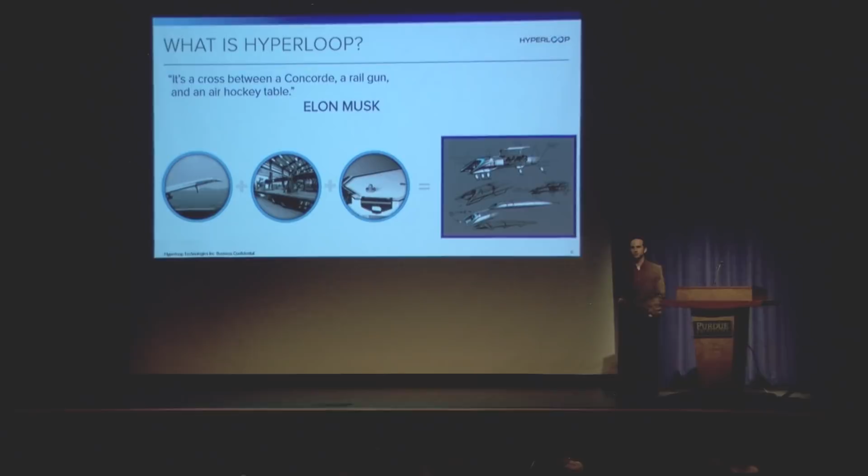That's the Hyperloop Alpha, and that's the white paper that Elon outlined in the fall of 2013, and I'm sure most of the people in this room are familiar with that. That was the starting point. And at Hyperloop Tech, we've really kind of taken it to the next level and moved it to our version of that. And our version of that is this new mode of transportation.

So we're looking at transport inside of a fully enclosed tube that has electric propulsion and brakes to start and slow the pod down. We'll go into all these in a little bit of detail, and you get to see the hardware that we're making.

And then inside the tube, we've got an ultra-low pressure environment, so roughly 1/1000th of an atmosphere, or like flying at 160,000 feet of elevation. So 4 times higher than the plane I flew on 12 hours ago to come here, and Jem has me running around like a crazy dog.

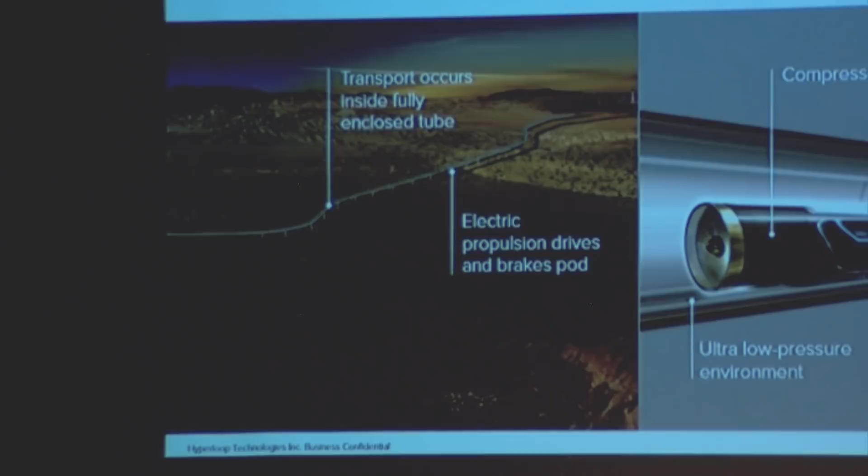But that's a big part of the system, and that's why we've got the tube. We've got the compressor on the front to reduce the effective drag of the vehicle. And then we've got the levitation system, which is the question I've heard the most today from the different groups: what are you doing? How are you doing it? We'll talk about what that looks like.

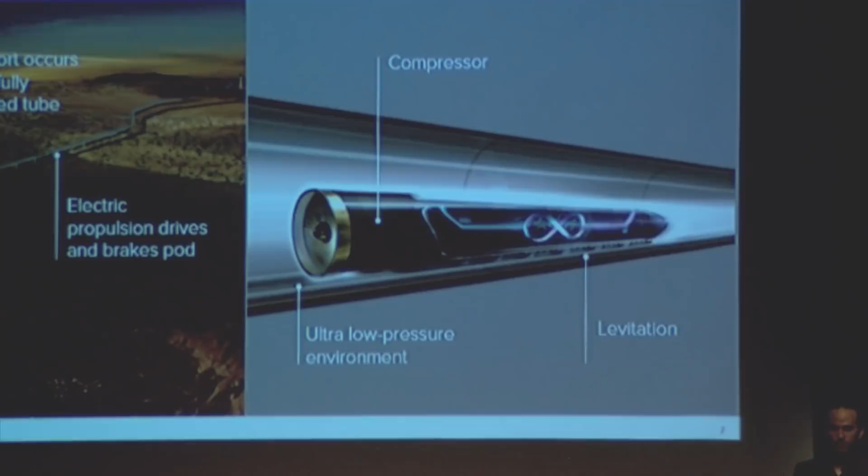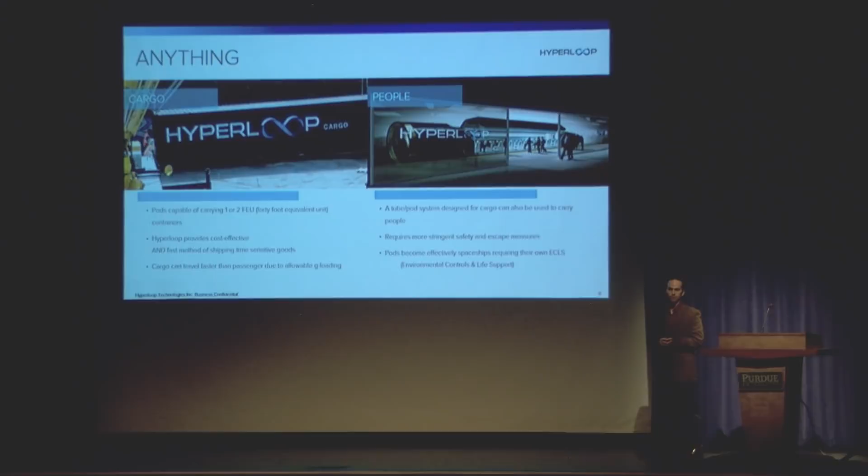But from a high level, we're looking to move anything, focusing on people and cargo as the foremost thing. If you think about what Hyperloop is long term, it's a new way to get from A to B. For people, that means really fast transport, and safer transport than exists currently today. For cargo, that means the on-demand economy we live in and work with today is going to be facilitated. So you've got one distinct Amazon hub that might be in the middle of North Dakota feeding the entire United States with same-day type of delivery. And the last mile with automated vehicles and drones and all of that is really going to be a seamless way to integrate the future together.

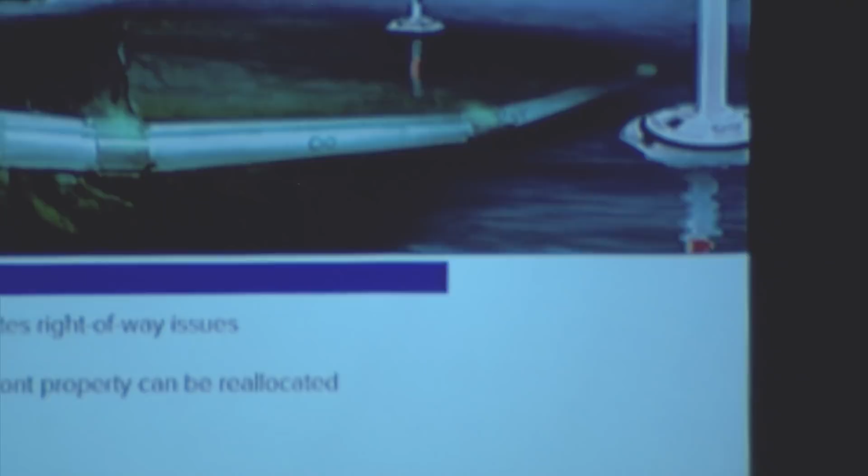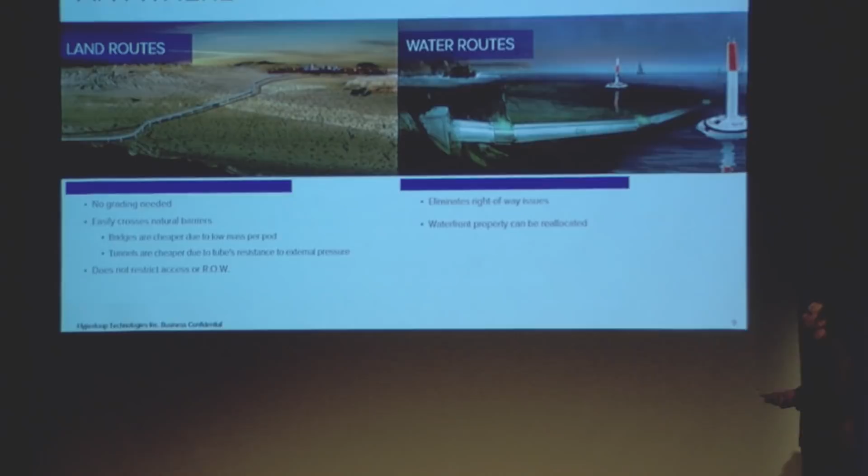And we're looking to move it anywhere. So there were a couple civils in here, so we'll start with the land routes. One of the things about high-speed rail is it's meant to connect two cities together, except along the way it divides the entire corridor. So it's meant to connect people, but it divides them at the same time. Hyperloop offers a solution to not do that anymore. So instead of having this no-crossing zone, we can have an above-ground distinct pylon structure, which is part of our low-cost type of system, and that allows easy access underneath. You can have no grading needed, none of the stuff that high-speed rail would need, and none of the stuff that highway would need, and you can do it at a much smaller footprint in a more sustainable way.

And then ultimately, we're going to move this into the water.

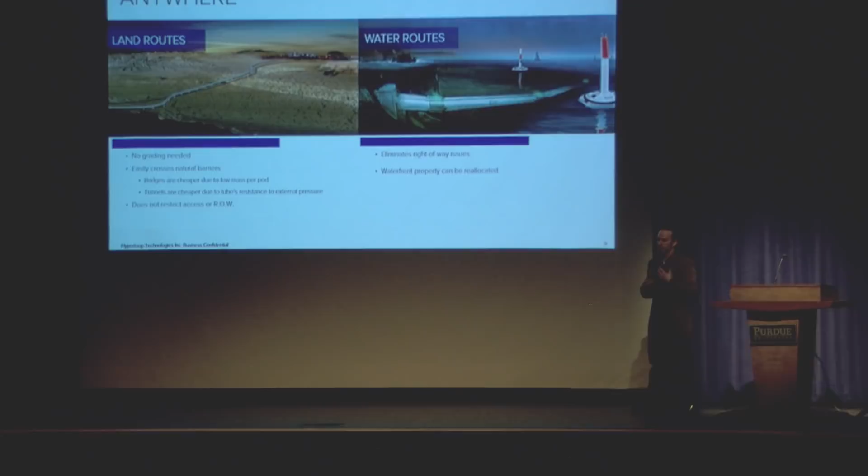So if you think about what a water route means, that means if we went from Los Angeles to San Francisco, we would do that in the water. So you get rid of a lot of these right-of-way issues and a lot of the potential hiccups and hurdles of getting a major infrastructure project installed.

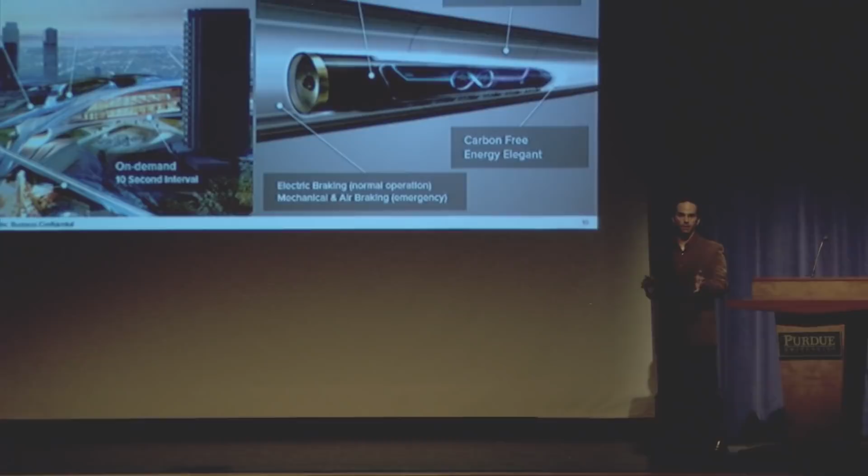And one of the other things that's really interesting about the water routes is what it can do to ports. So if we had offshore ports, let's take the Port of Long Beach, for example. We're constrained in this really high-value area. It's beach city, Los Angeles, California is one of them. And it's congested, it's constrained, you can't expand it easily.

So if we take a Hyperloop and we push it out to sea, say 10 to 20 to 30 kilometers out to sea, the developers of those ports can then say, all right, I can redevelop this land, I can make my port inland at much cheaper land, then I can expand my port in a very organic way, and I can move it further inland and facilitate a broader network of Hyperloop hubs.

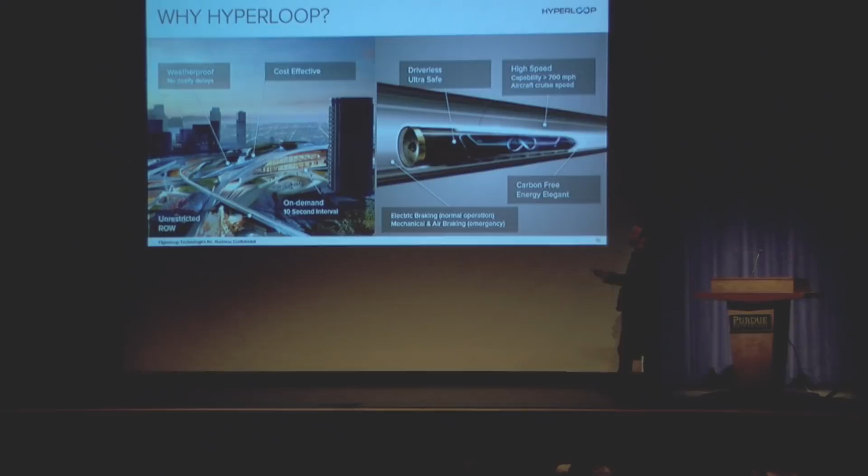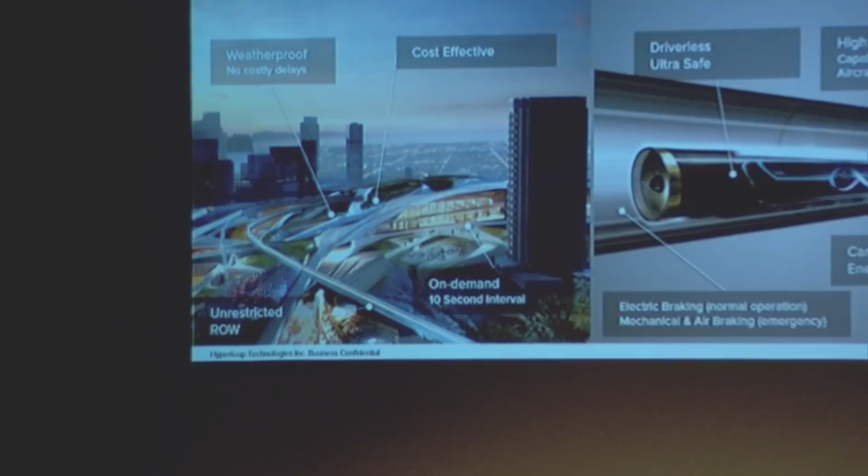So all those things really go to what the benefits of Hyperloop are, and I think a lot of the teams here have identified - I think SpaceX has done a good job of forcing it on the greater community - how do you make your system viable? So these are just a couple of things that make our particular system viable, and it's weatherproof. In areas that are cold, snowy, rainy, stormy, imagine a transportation system that's unaffected by the weather. That's a massive, massive improvement.

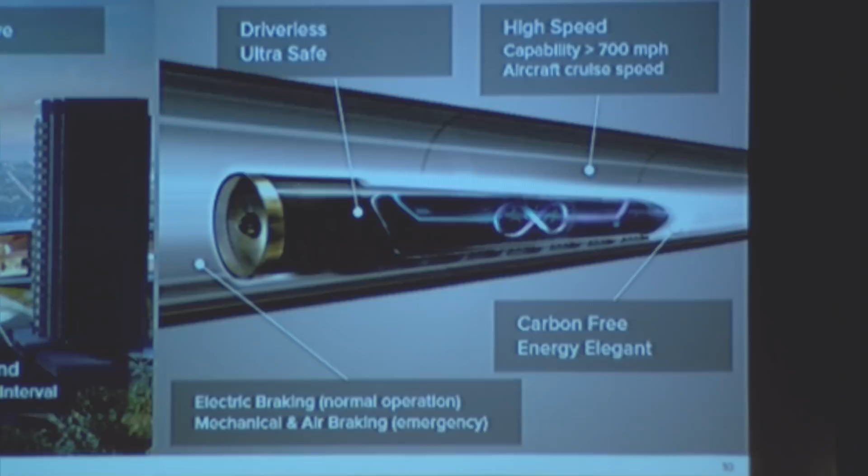It's unrestricted with the right-of-way, as we talked about. It's cost-effective. We're looking at costs on the order of about 60% of high-speed rail for technology costs. And that's 60% cost for a machine that performs 2 or 3 times the speed, which is a massive upgrade. That's essentially getting a Ferrari for the price of a Fiat.

And as we move forward, on-demand departure - we're looking at cranking through these pods at a very high throughput so that we can get as much cargo and volume through here as possible. And then inside we've got the autonomous revolution, of course, the driverless, ultra-safe vehicle.

I had the privilege a couple weeks ago of being at the KTH school in Sweden, and they're really doing some cool work with autonomous integrated trucks together. So looking at doing that for the Hyperloop. How do you do that? What are the challenges associated with these speeds? That's a really interesting design problem from a control side.

High speed capable. It can tie into the grid in a carbon-free, energy-elegant way, and we're not looking to do this old-school, dirty technology. This is a much cleaner technology. There's not grease everywhere. This is really what the future looks like, a clean, elegant solution. And then ultimately, various forms of braking.

So we'll kind of skim through this real fast. Any of you who've traveled at any point in your life already know all of these different things, and it's an expensive mess. You know how congested everything is, how long it takes to get everywhere. And it's not that way just here in the United States - it's that way kind of across the planet. And it's dirty, it's dangerous, it's unsafe. So looking at all of these different things to make it better.

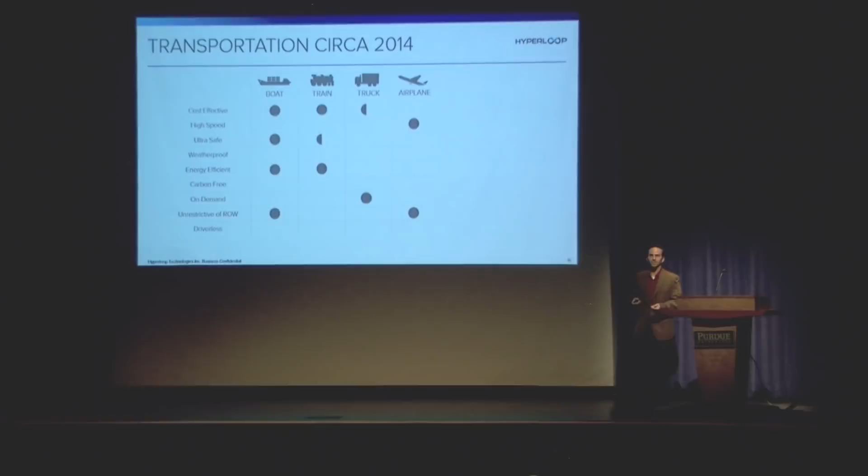These are the 4 modes of transportation, and the one thing I want you to think about is how many people have great-grandparents? Oh good, all of you. So your great-grandparents could take the same 4 modes of transportation that we can - a boat, a train, a plane, a car. I mean, we're all engineers - that's somewhat embarrassing, especially since most of us are mechanical or aerospace engineers. We're still making the same things, and they're not getting appreciably better. And of course, Hyperloop's going to be the solution to all of those things.

So if we're going to look at the team, I mentioned before we had one Purdue alumni who's going to start with us full time, Jem, and he's doing a lot of our aerodynamic work. The detailed CFD and drag and lift studies of the compressor as well as the pod is a unique challenge, and Jem has spent a lot of time in his past during his PhD doing that work. We worked out a great situation where he gets to come to sunny California in winter, just remember that when he leaves you in a couple of weeks. He's going to come out, finish his PhD, but he's going to be doing it on stuff that's related to Hyperloop.

We had, I believe, 6 or 7 interns last summer. A couple of them went back to school, and we've hired 3 of those on full time, and we're continuing to look for that. If you're looking for anything - and we'll get into all the different types of roles they can have - the experience that you're going to gain in the pod competition is going to be invaluable. That's why we love the pod competition, is we can find the best and the brightest.

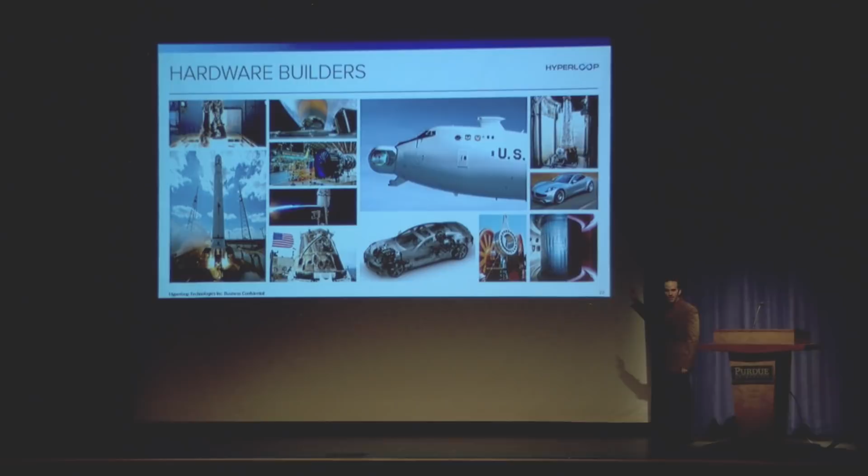And what we're looking for in more experienced people are people who've built stuff. So we built rocket engines, spaceships, electric vehicles. This is a fusion reactor. It's a satellite. That thing in the center is a flying laser - it shoots a 1-foot diameter beam, chemical laser, and then it farts out this noxious gas to the side. And we've got the guys who designed a control system so when the plane's twisting and wiggling and falling, that beam is staying exactly on its target.

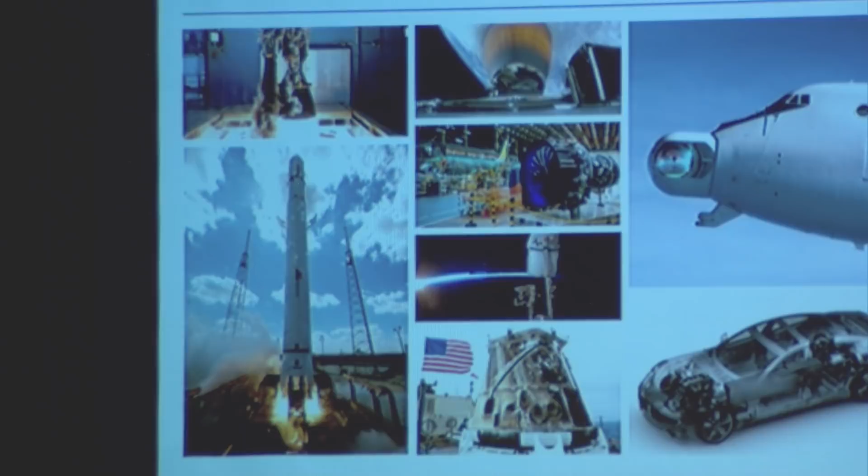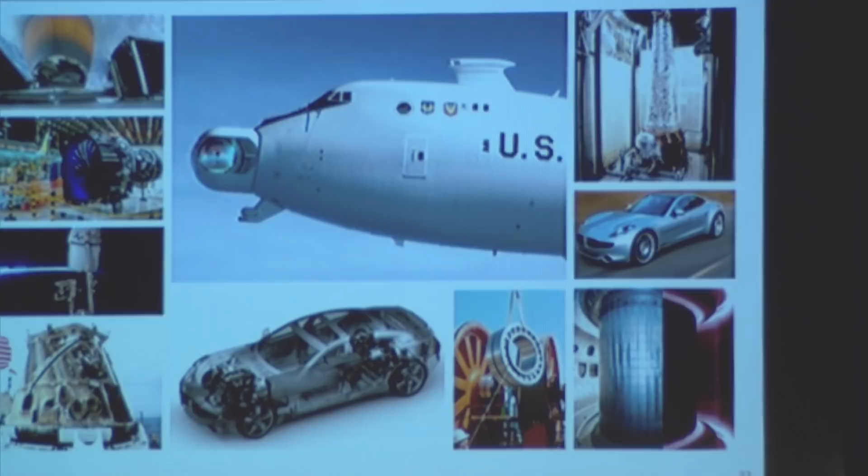So these are the type of people we're looking for - people who've built stuff, people who've built hard things, solved hard problems, but more importantly, people who don't have to be the experts, but want to be the experts. They want to say, 'how do I do this?' And I saw that today in the class - I saw, like, 'why are we doing it this way?' That's what you've got to have, that curiosity, because no one's ever built a Hyperloop before. And we have to learn how.

So we'll kind of roll through this. June of last year, this is when Brogan, myself in the middle, met Shervin, Jim, and Scott Stanford. So that was sort of our kickoff meeting.

The company - I got impatient at Virgin, and I just quit my job. And in November, reported to Brogan's garage. So I'd highly recommend doing that, because you can't put one foot in the kiddie pool if you want to jump in eventually. Just go for it.

So last December, we were in the garage. That's not beer, I promise you.

No, but starting point, we ended up getting our Series A round of funding December 22nd of last year. This time last year, there were 2 people at Hyperloop Tech, 2 full-time people, and that was our starting point.

Since then, we had a sort of coming out party in February, a Forbes article that really announced that we were a company and organization. I could re-engage with my friends socially and tell them what I was doing, because I had to quit a company where I worked with a bunch of colleagues and friends and didn't tell them where I was going, which led to speculation.

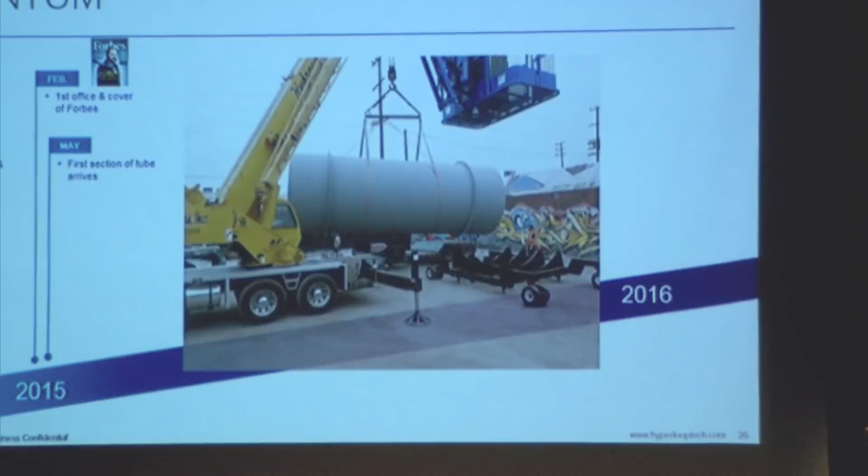In the May timeframe, we got our first section of tube. After May, we started this, and we'll talk about what this guy is. This is our own custom designed and built wind tunnel, and we designed and built it in 9 weeks. Only one like it in the world, and you'll get to see how cool that is. We'll get to tell you why we did that.

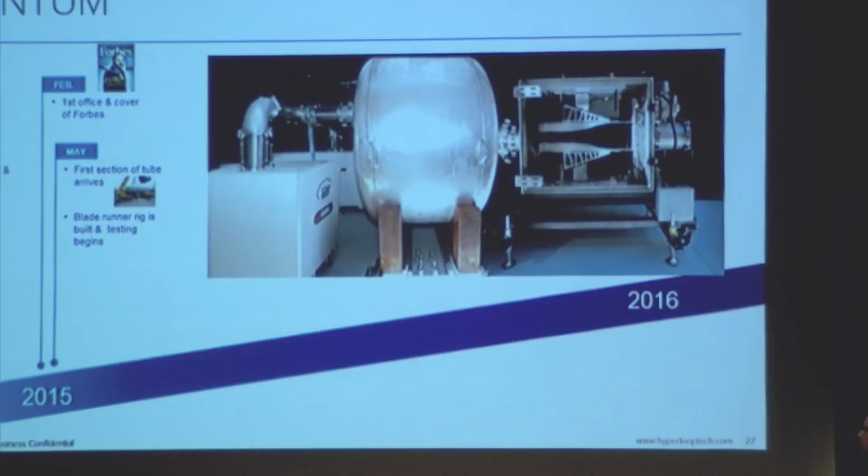Shortly after that, we built our Blade Runner Rig, apologies, a little slow, you can see it here. That's testing our levitation technologies, and we'll give you a bit more detail. The wind tunnel was operational at that point. By July, Rob had come to visit us.

We had about 40 employees. This was the spot then. It was early motor development for the propulsion system.

August, the Levitation Rig was operational. September was a big month for us. We announced Rob as the CEO, got a much larger office space, and increased the team again.

At that point, Rob went on and did his press release, and I think it's better to hear from him. So, you want to play this video? Maybe click it.

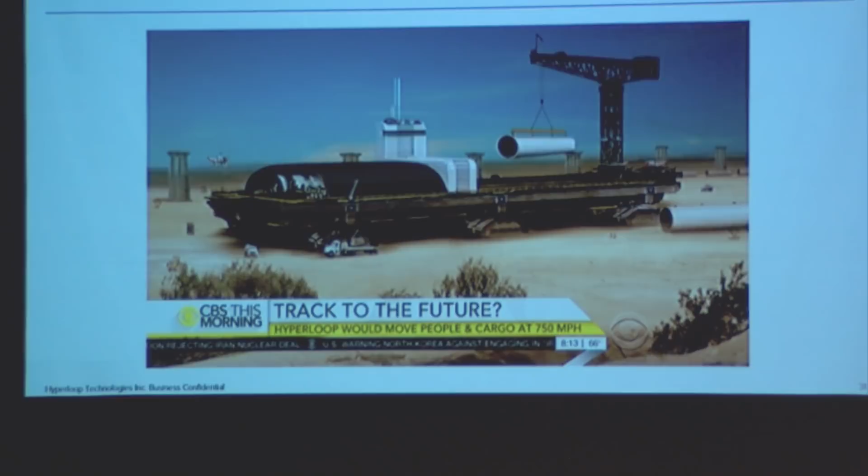Million in second round funding, and the team now includes newly minted CEO Rob Lloyd. I've seen what this guy can do in 6 weeks. Lloyd spent 20 years at networking giant Cisco, where he helped drive the internet revolution. It feels like we're exactly at the beginning of building out the next big global network, except it'll be a network for people and things rather than for data. How long before the first functional Hyperloop system? 3 years from now, I believe that we'll be designing and constructing the first 2 or 3 production Hyperloop systems in the world. 5 years from now, we'll be moving goods and people.

There you have it, straight from the source. So he believes in the company quite tremendously, and it shows. The throughput we've got and the business development side since he's joined has been incredible.

October we moved up to 55 people. November, 70. As of yesterday, we're at 74. So 2 to 74 in less than a year is quite the growth. It's painful at times, but at the same time, we're not doing something small. We're not making an app.

We're making something big. Linear propulsion test, which is a big deal, we'll talk about that in a sec. And then construction on our big test site will begin at the beginning of next year.

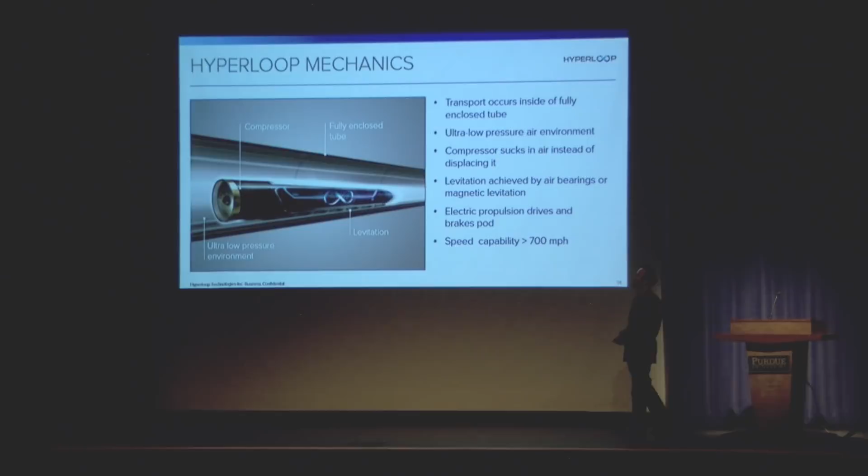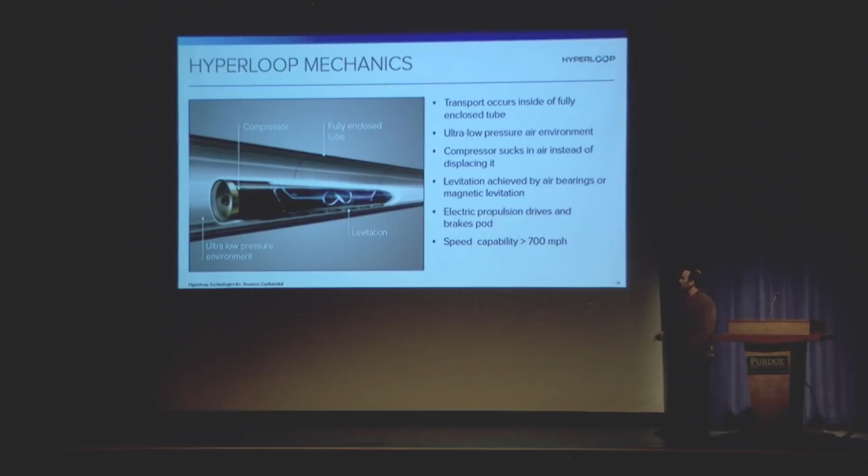So now into the nitty-gritty, the reason you guys are all engineers, the reason you're here: the engineering. We've got the compressor, the low-pressure environment, levitation system, and the tube. So you know all this, I'm not going to go through it in detail anymore, but I'm going to talk about what we're doing and all the different things that we talked about in the past.

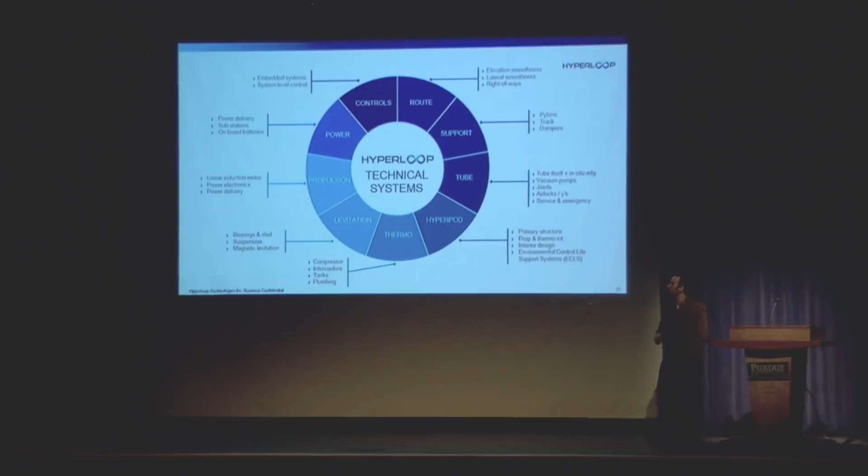So, civils. We've got quite a few things here: support and tube. Support structure, pylons, tracks, dampers, earthquake mitigation, civil soil work, underwater work, all kinds of stuff there. We're not going to do this the way other civil firms do it. We're going to do it in a much more cost-efficient way because we've got a very different system than what exists today. On the tube side, the biggest cost driver, if you look at the Hyperloop system, is the tube.

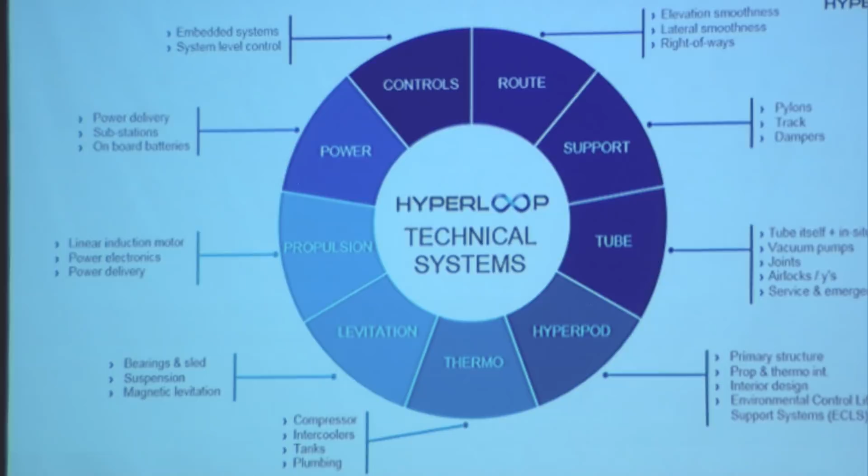Let's make it cheaper, let's make it better. We've got some really cool stuff to do that, and we can take massive cost savings. We can make this one of the cheapest systems, more robust than a steel tube could ever be. We're doing that optimization. These ideas aren't the ones that sit in your textbook. They're the ideas you think about at night, come in, execute, and come out with a new way to do it.

We'll talk about route at the end. Hyperpods—so the mechanical and aerospace side here. We've got basically a chassis. How do we build this thing? What do we have to put in it? Propulsion, thermal systems, environmental control, you name it. How do we integrate that into a package? How do we reject heat? What's the thermal cycle on this? If I'm going to use a compressor, how do I cool it? Do I need to cool it? What does this look like? Is it existing technology or is it brand new?

All of this stuff is massive amounts of innovation and iteration, because we can build a Hyperloop right now, but it's not going to be as cost effective as it can be long term. So that's what we're looking to do—figure out a way to do this even better. We've got some great ideas we're working on in parallel with the big development.

The levitation system—the question I've heard most often from every different school I've gone to is, what are you guys doing? Is it air bearings? Is it maglev? Is it magic? Is it fairies? We'll talk about it in a bit.

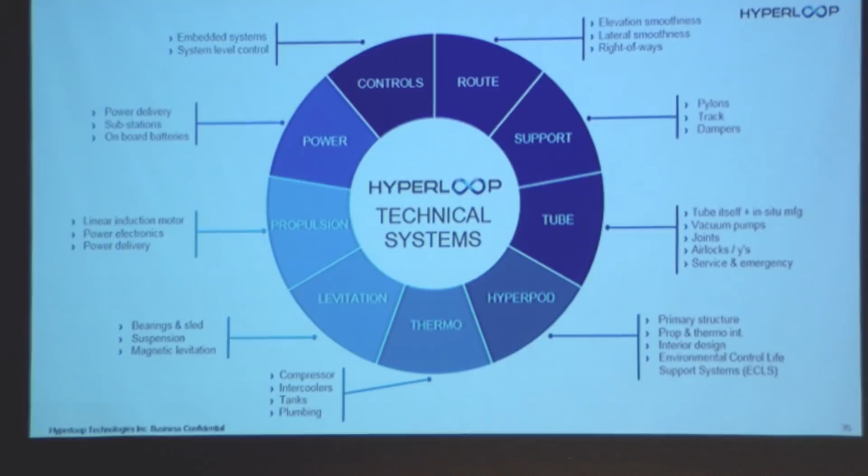From a cost and efficiency standpoint on the propulsion side, nobody really makes these linear machines, nobody makes them at the power levels we want. How do we do that? How do we validate it? On the power side, we're looking to deliver 30 to 60 megawatts, pulsed power—I'll tell you how much utilities love that, they're like 'what?' So how do we do that? How do we do it cost efficiently?

Control side—these are autonomous vehicles. So all of that stuff, how do you make it work? How do you talk to the pods? If pod 2 has a problem, how do pods 3, 4, 5, 6 react to it? How do they deal with it?

The route—this is something I'm ultra passionate about. All of these little systems are encompassed in the route, and they're encompassed by an optimization framework. How do we create cost models, performance models, route models? Where do we tunnel? Where do we bridge? We've got some of the most sophisticated optimization tools out there, and we've built on those with our own designs. That right there is the key to the kingdom, because we can do all kinds of innovation here—if we mess that up, it doesn't work.

I talked with a couple of professors today who've done a lot of work with the grad students here on optimization. Learn it, use it, love it, breathe it—it's going to be the way of the future.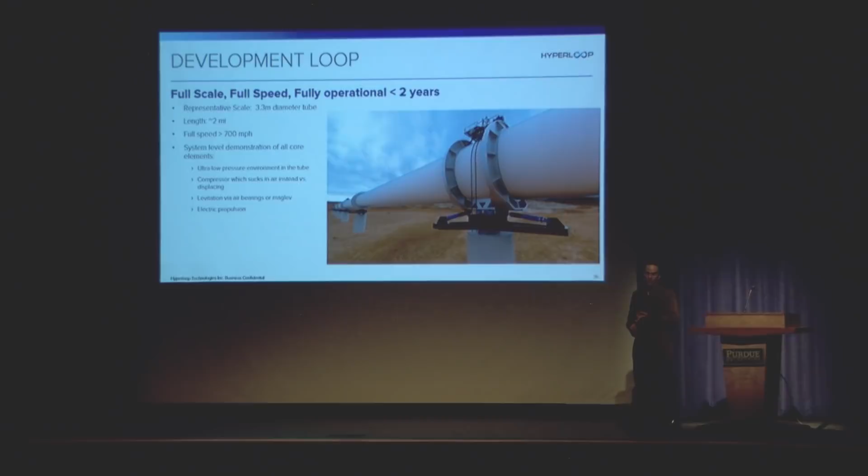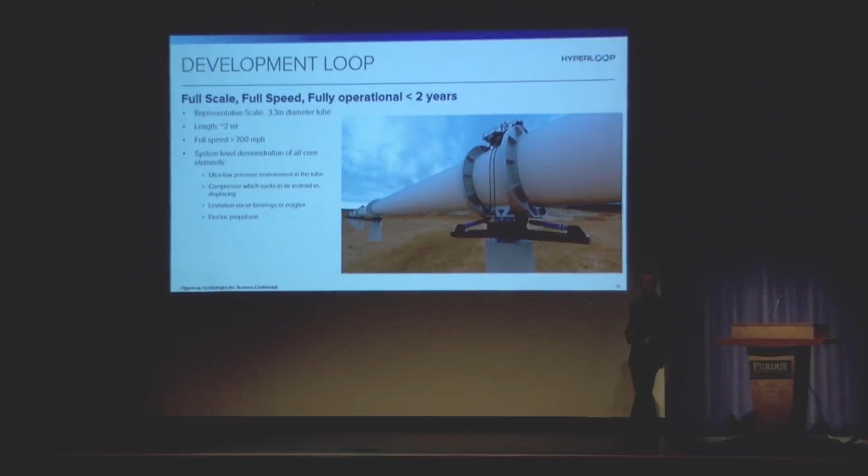We can hold pressure, we have a levitation system, we've got a compressor on the front and an electric motor in there—complete system. This will not be representative of the accelerations people will actually see; this will be much higher, accelerating at like 2.5 Gs, slowing at about 4. But that's way harder than what we're doing for people, so it'll demonstrate that we've got the controllability.

Here's a little more detail when we look at this. So DTLA, this is our development in downtown Los Angeles. We're building this crazy tube—we've done it, you can see it right here, and we've welded it up. We've done vacuum testing; we've held vacuum in here for 10 days without constantly maintaining it, so our leak rates were way smaller than ever.

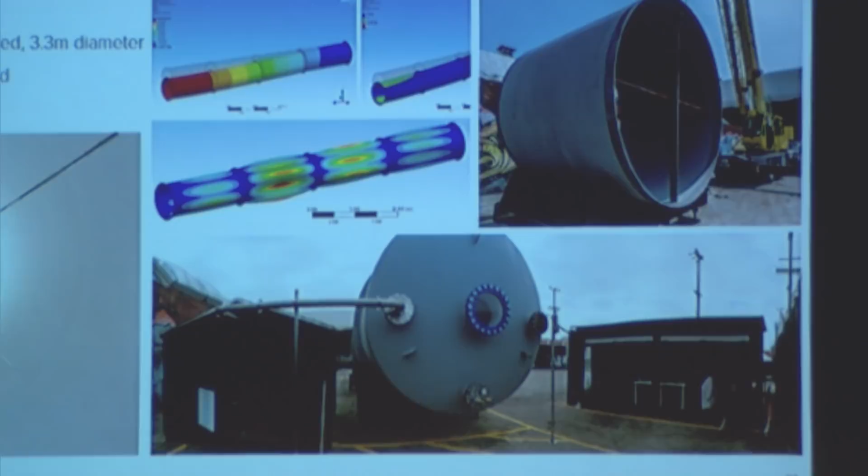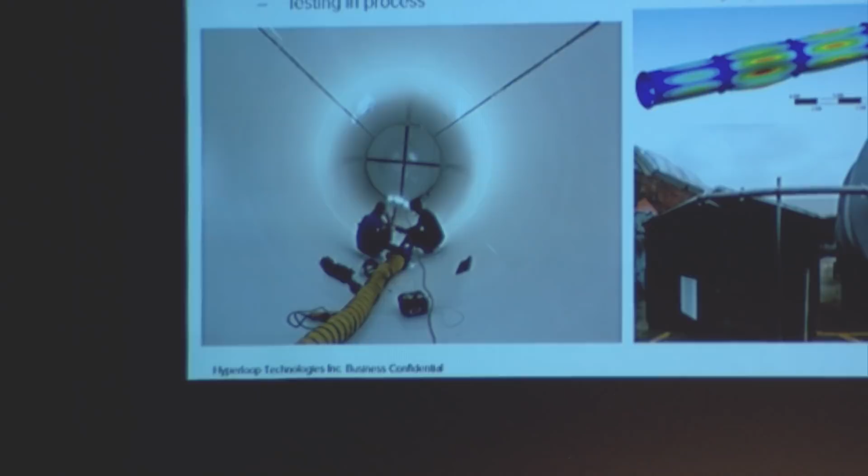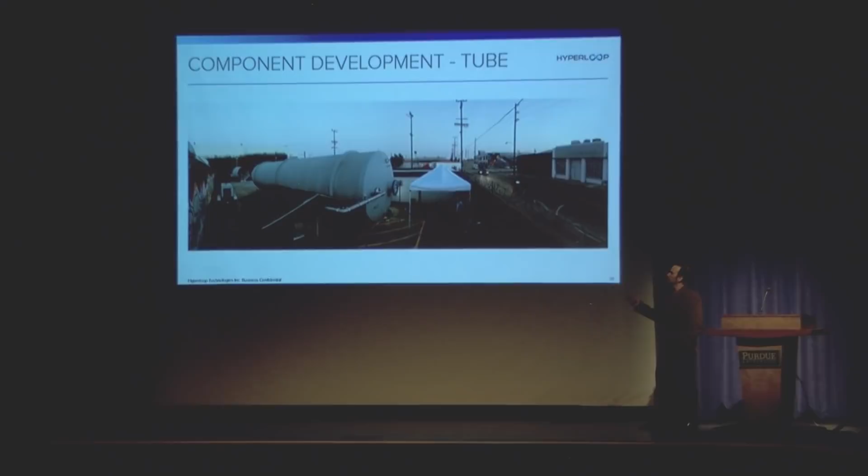In the initial group that did these welds, it looked like I did the weld, or it was Jimmy's first coloring project—and the leak rates are well less than we ever thought they would be. That's boding very well for maintaining the system, and we're going to get more data as we get to the larger tube. Here's some more pictures of the tube, to get some rough dimensions of it.

And then this is our vacuum test. How many people have pulled vacuum before? All right, how exciting is it? It's like watching paint dry. So we at least put a balloon in here so you could see that something was happening.

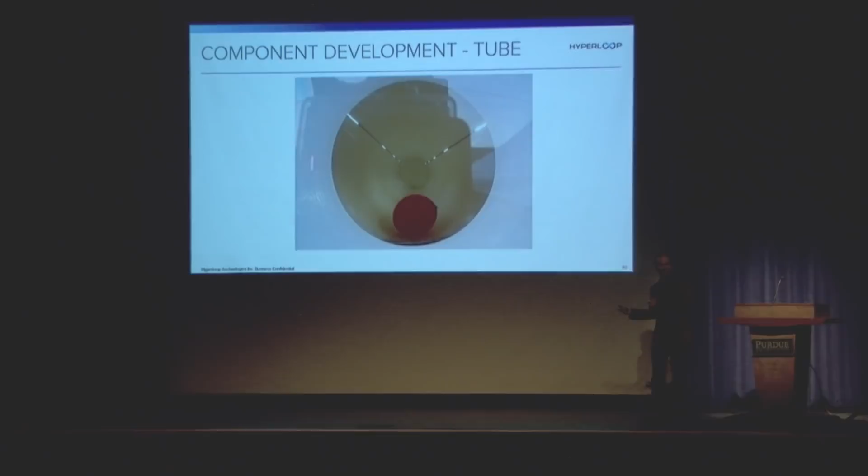And it didn't fail. I probably wouldn't have shown you the video if it did. Maybe I would have, depending on how great it was. But it held. This is just to show we can do that. We've got the ability. We learned quite a bit from that, and it's still part of our ongoing test bed.

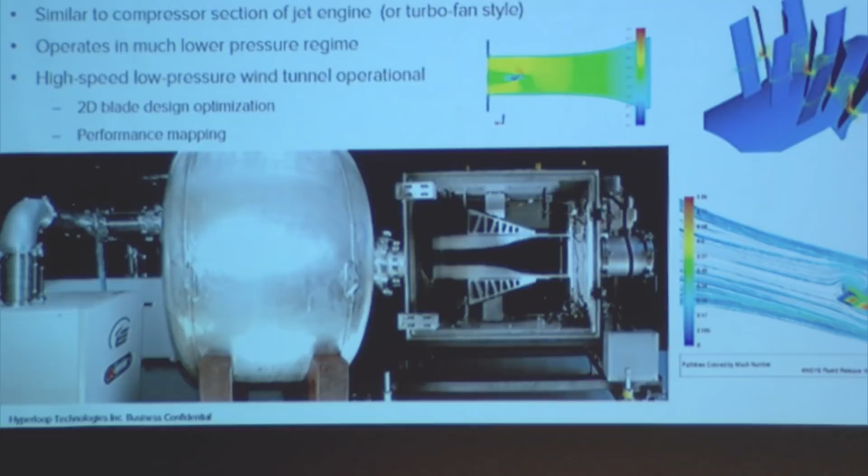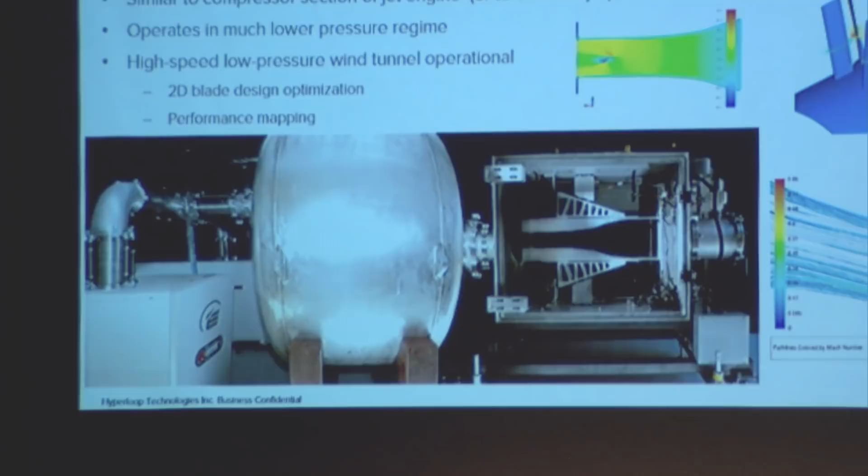Compressor. So we talked about what this is, flying at 160,000 feet. The only thing that operates in this is either going up through it or down through it. Nothing flies here, nothing does anything, so we had to develop something to do it. And the computational tools, they're not the best.

So we went out and we got a Purdue grad to help us with it. And so we've got some CFD models. These are some Navier-Stokes solutions using conventional off-the-shelf codes. We've got some ideas for it, and some other more academic codes that we're using to verify it.

But in the same vein as everything else we do, we have to go test something, because we're no good without the test. So we designed and built this wind tunnel. And you'll see that here.

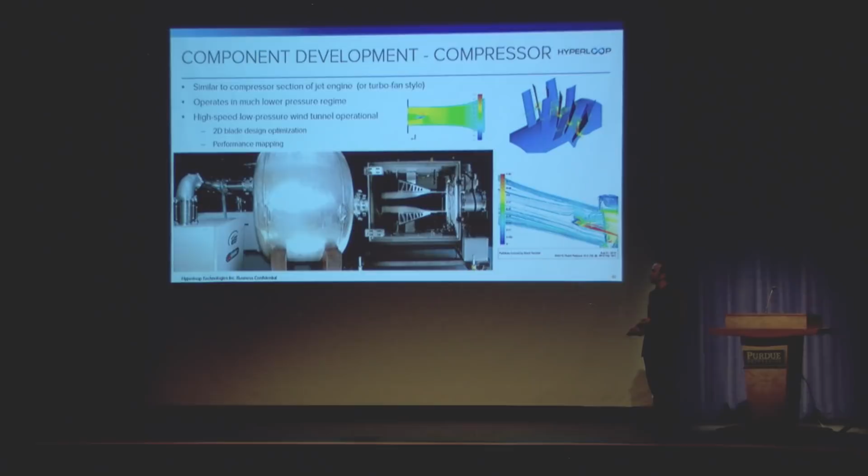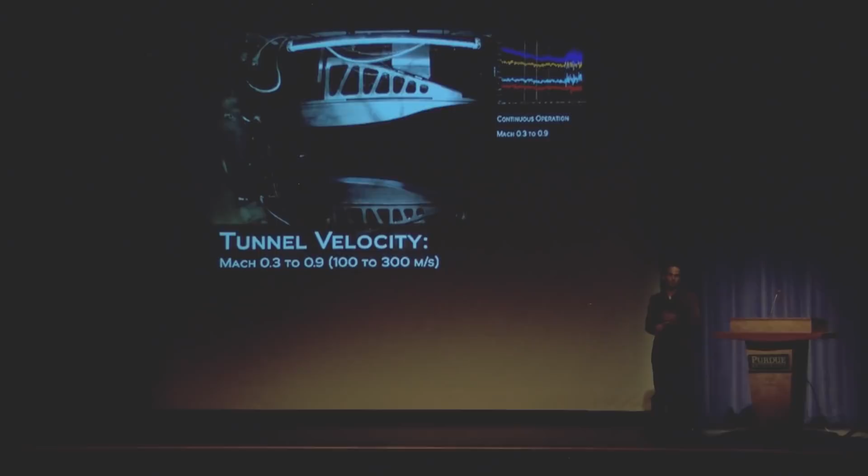Let this play. But again, this is something where I called a vendor and said, hey, I'd like a wind tunnel in 2 to 3 months. And he said, we'll get you a design in 2 to 3 months. And I hung up the phone and said, well, that's not happening. So we designed, analyzed, and built this with a team of 6 people in 9 to 10 weeks. Kind of gives you a feel for the speed at which we execute.

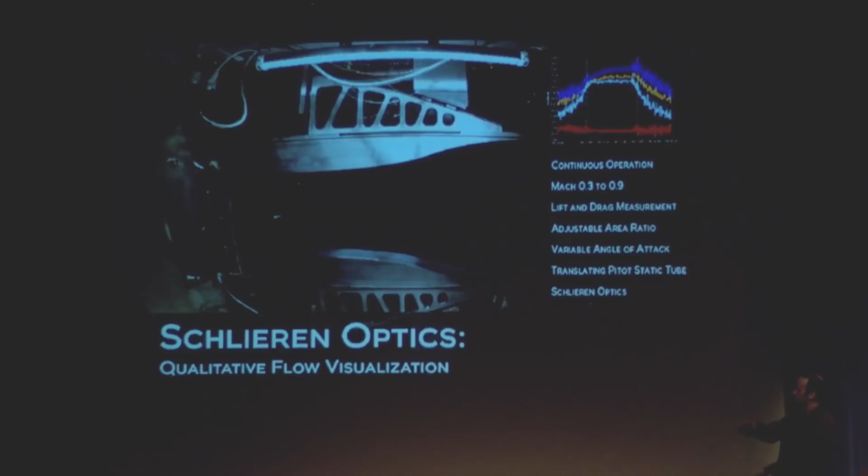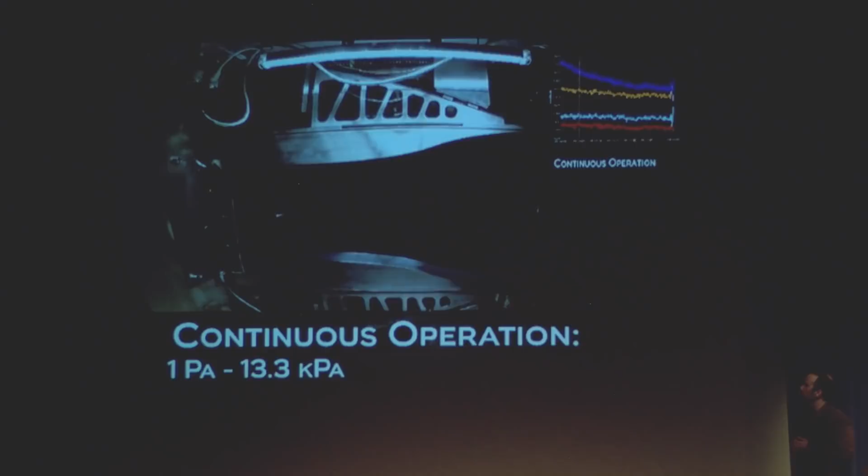But this is a fully capable wind tunnel. We can adjust the test sections to measure lift and drag of our airfoil shapes for the compressor. We can put mini pods in there. It's really the only one like it in the whole world, and it can run continuously, which a lot of the other ones can't, since they're just blow-down type wind tunnels. But it's a real great piece of engineering. It's a great showpiece, but it's providing a lot of very, very valuable data. And it's going to be an integral part to Jem finishing his PhD with Hyperloop at Purdue.

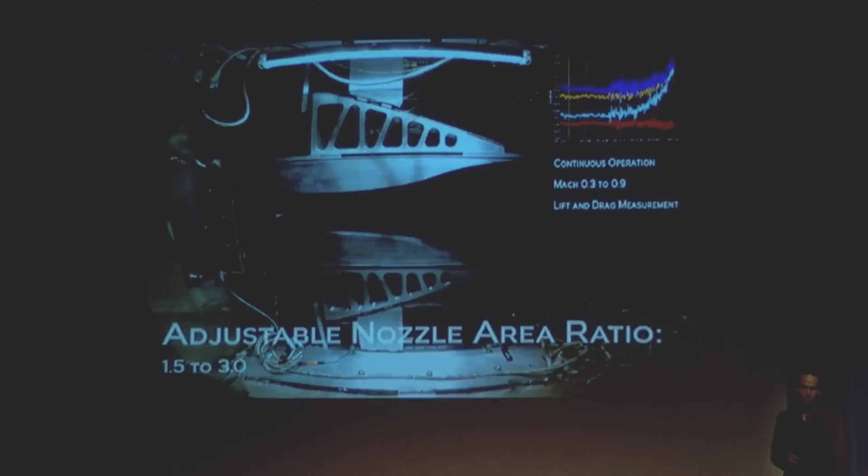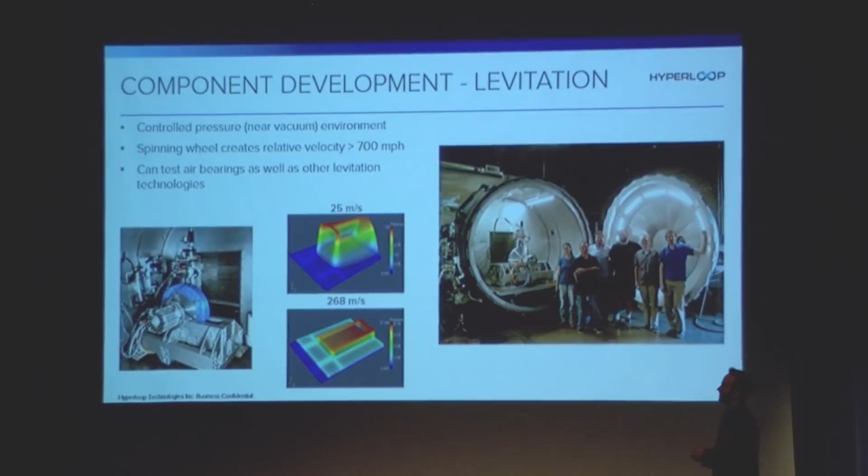So then our levitation rig, and the moment I know you guys have all been waiting for, and I'm probably going to disappoint you. But initially, we were starting with air bearings. So this is some air bearing work. We've got a little rig here, and you'll see it. And this might be why we don't want to use air bearings, at least right now.

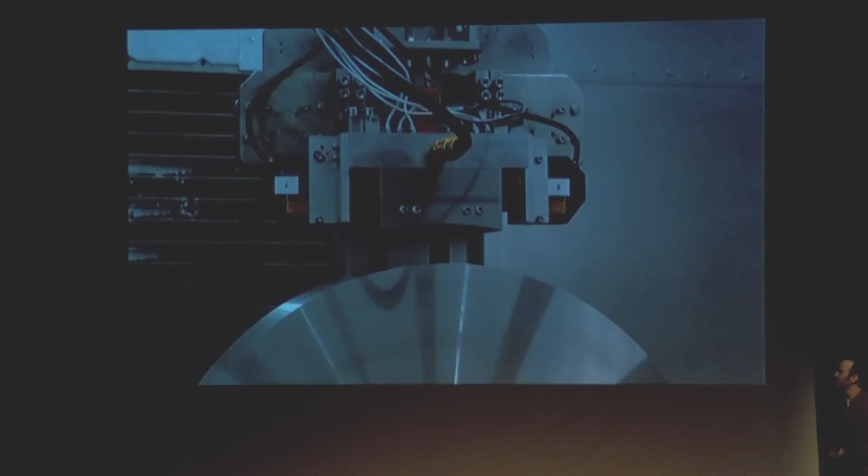When do you think it's going to stop? Is it? Is it going to stop? Okay, it did.

So that's our levitation rig. We've got measurement sensors on that. We can measure lift, drag, we can measure stiffness characteristics, quite a few different designs. And we've moved away from the air bearings to a passive maglev system. That offers quite a few things in terms of energy savings, heat transfer savings, cost savings, ride height. It's really quite a big change. And in my experience, I've never seen really a trade study that was so clear cut.

So a lot of work to be done. It's a very different problem than what the SpaceX competition's offering, because they have a track ready to go and we're designing our own custom one.

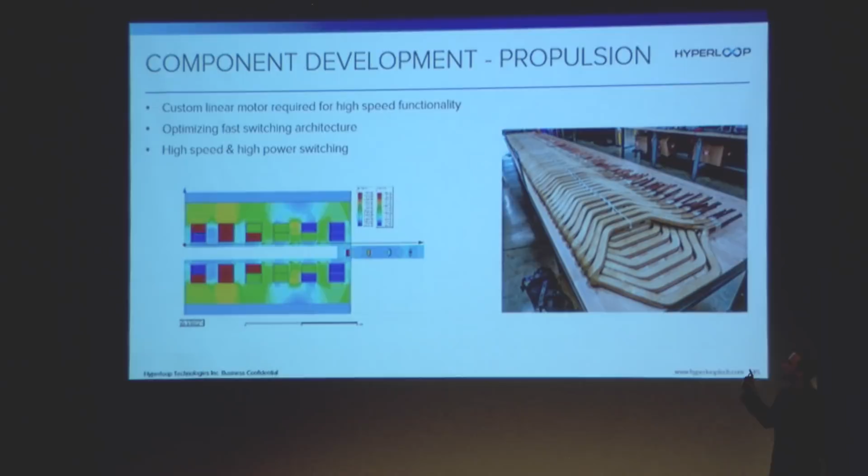So had a big announcement yesterday, and I'll skip to the goodies. But this is our propulsion session. So cut that rotational machine in half, unroll it on the ground, and then you've got a linear electric machine. So this is a linear synchronous motor. And we get those poles just lined up, slightly offset, and we drag that cart forward at full speed. So you guys came at a great time. I'm glad I could announce this today. You want to roll the video?

So yesterday we announced this, which is our propulsion open air test, which is testing the exact same motor that we're putting in the tube.

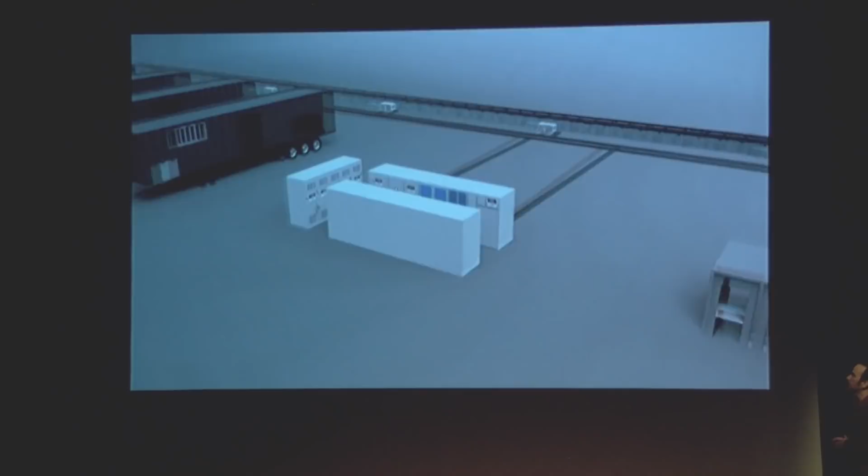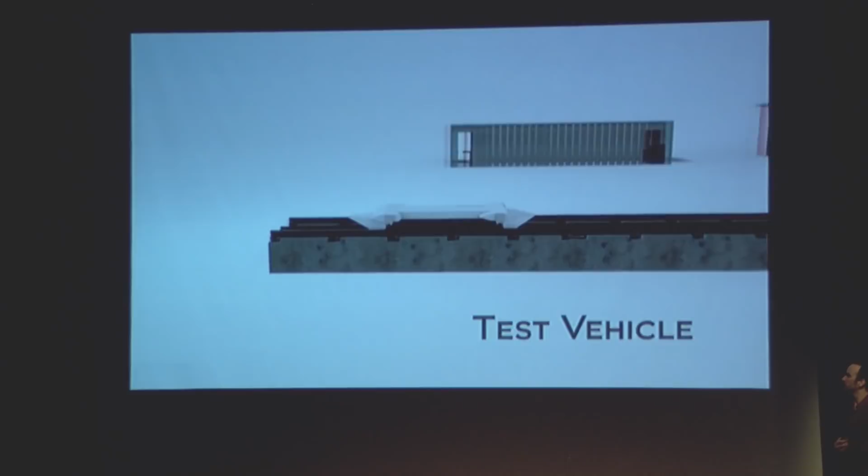So we've got our command center, which we've fabricated on site, and we can ship out to the test site. Here's our power electronics VFD, switches for switching the different active sections of track, and then here's the length of track. This is about 200 meters long. Test vehicle, and you'll get to see basically this thing take off.

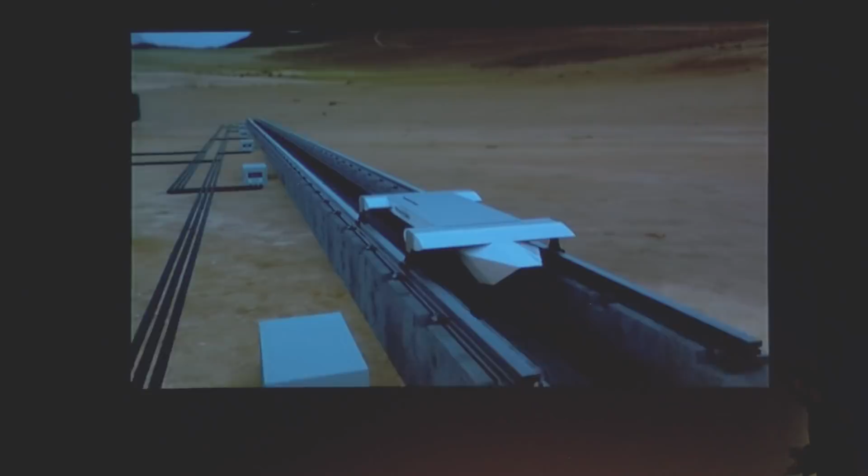And this still doesn't give it or do it really the justice that it does. For example, a Tesla goes 0 to 60 in something like 3 seconds. This goes 0 to 350 miles an hour in 2. So maybe we'll offer some rides, some intern rides. It's going to be pretty exciting.

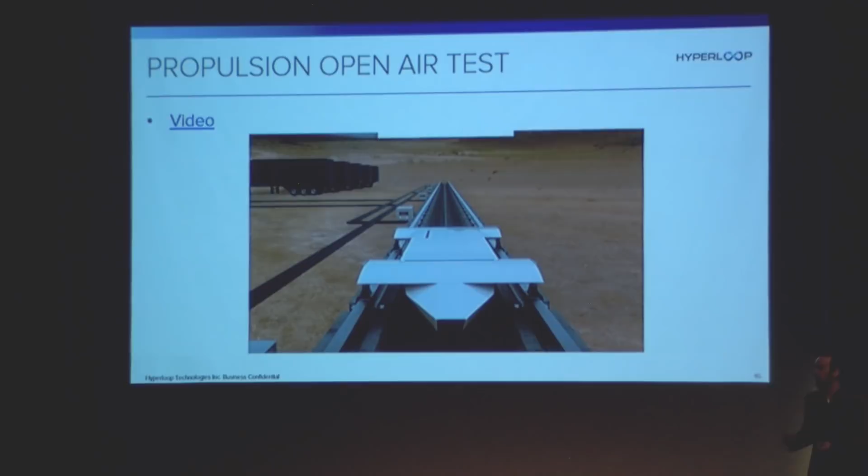But the real crux of this is, you saw the little testing machines that we're doing for the levitation and the compressor and everything, but this is the test machine for the motor. So this is the exact motor that we're going to put inside the tube, and we're going to make sure that it works here on this scale before we buy 2 kilometers worth of it.

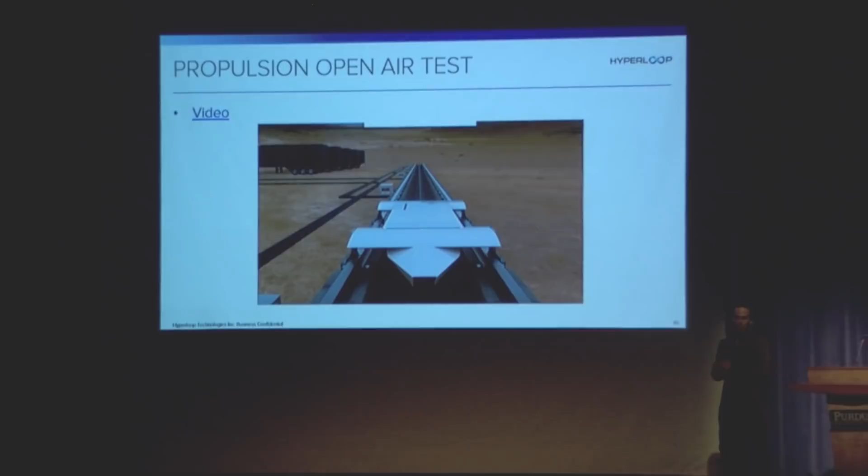Here's our route optimization. So this is an unnamed route in the southwestern United States between 2 large cities.

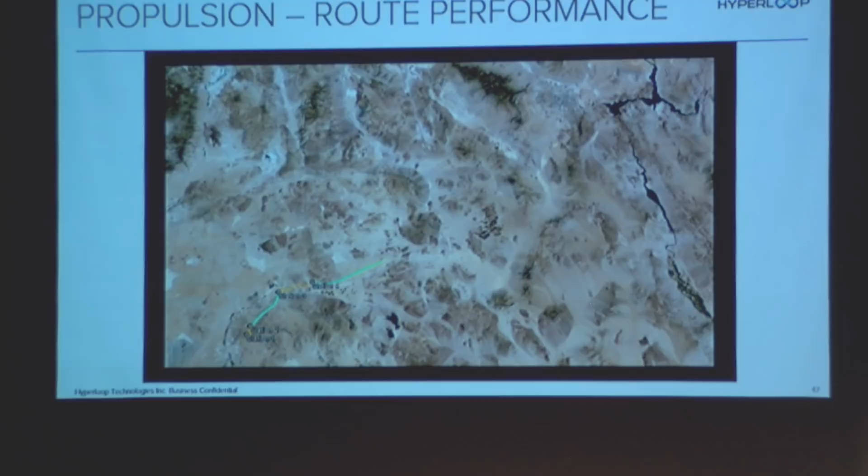So this particular one is, we've got these stations. One of the great things about Hyperloop, what makes it so cheap, is inside this tube the drag is so low that we don't have to have active track the whole way. We've got these discrete little stations that give a little boost, so only about 5 to 10% of the whole length of the track is actually active.

So in between these stations, we slow down from about 700 miles an hour to about 620 over about 50 miles. That's a very slow slowdown, and it allows us to have a really cheap, efficient structure. The maglev you see in China, the maglev you see in Japan, has an active track the entire way. We don't, and that's one of the reasons we're so cost effective - only in these discrete sections are there actual propulsion stations.

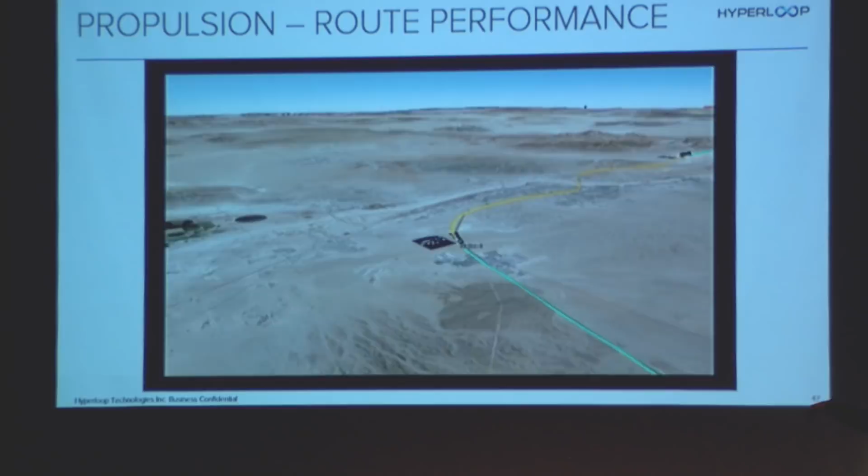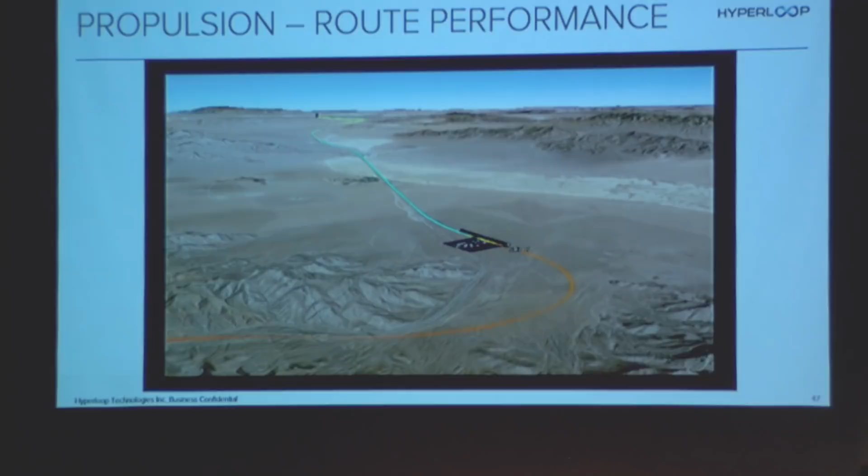This is a particularly windy route, so the optimization we did here is subject to G-loading and banking and all of that, but that's all part of our optimization toolkit that we're refining. Where are we tunneling? Where are we bridging? Where are we doing all these different things? That's one of the things we are going to be the best in the world at, because we've got some amazing people and some amazing tools already being developed.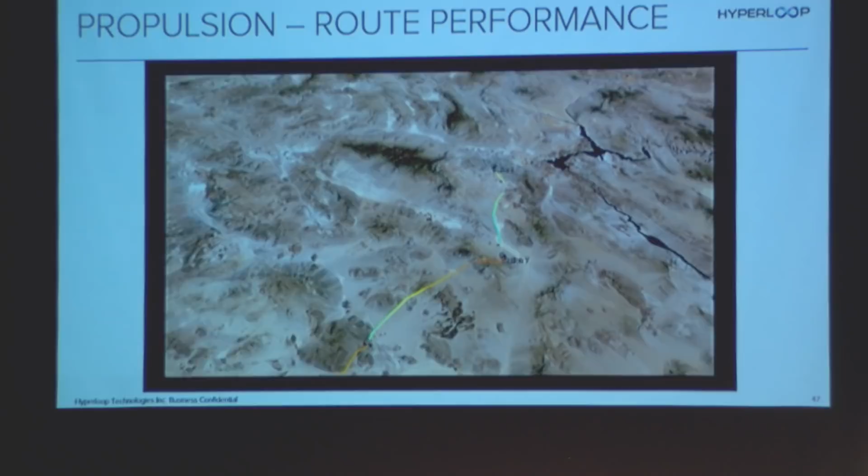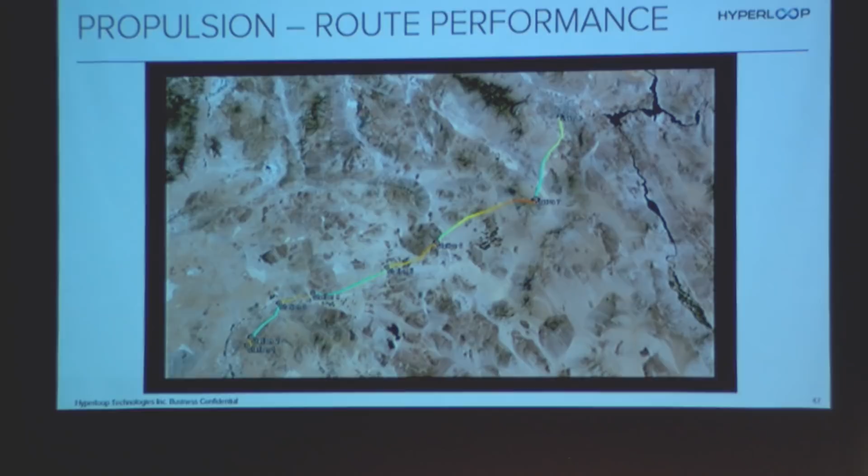So this was, again, the office in March. This is what it looks like now. We've gone from 6,000 square feet to almost 2 acres with about 18,000 square feet under roof.

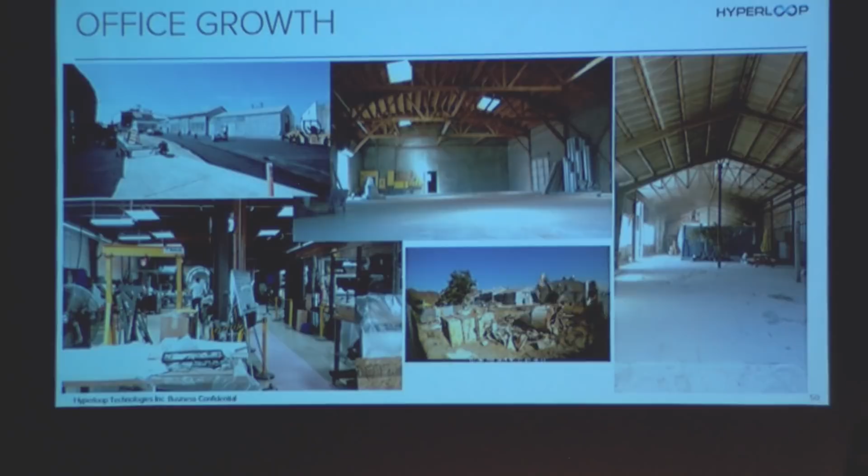You came, and in the meeting we were in for an hour, there was a new wall built. We had to walk around that wall to come out of the meeting. So it's really an amazing amount of growth, both physically and in terms of the team and in terms of the technology, in a very short time, because we say we're going to do something, we say we're going to build that tube by the end of this next year, and we're going to do it, because that's all our backgrounds have done and that's all we've ever done.

So this is some of the structure in the back, so that was the buildings inside. This is some more manufacturing space that we're getting. So we're going to build the first 2-3 pods.

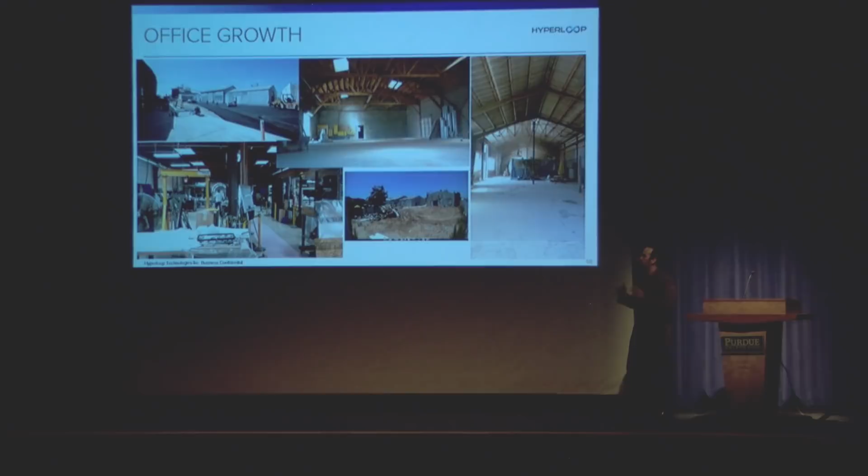This other building, this beautiful building that actually looks like a wooden aircraft hangar, is going to be more office space. We're getting pretty filled up. This is sort of back in June, clearing out a bunch of the space in between. We've got all this area to continue fabricating inside. This is our current manufacturing space, and you can see some of the test rigs in the back. So massive growth with that.

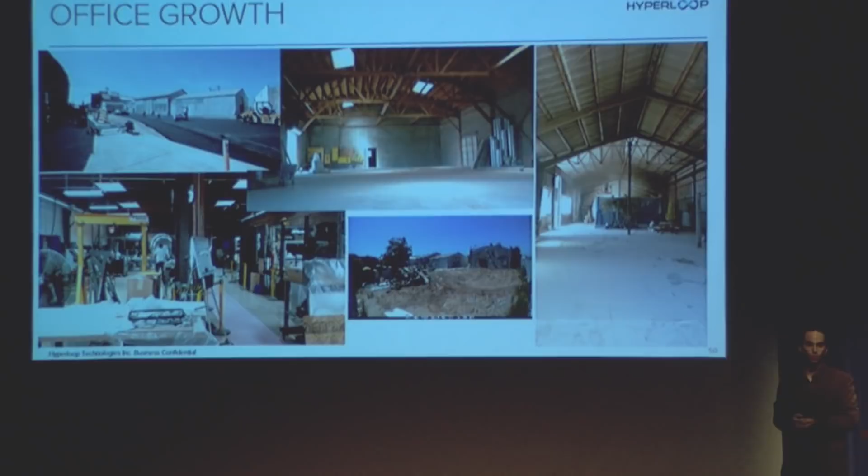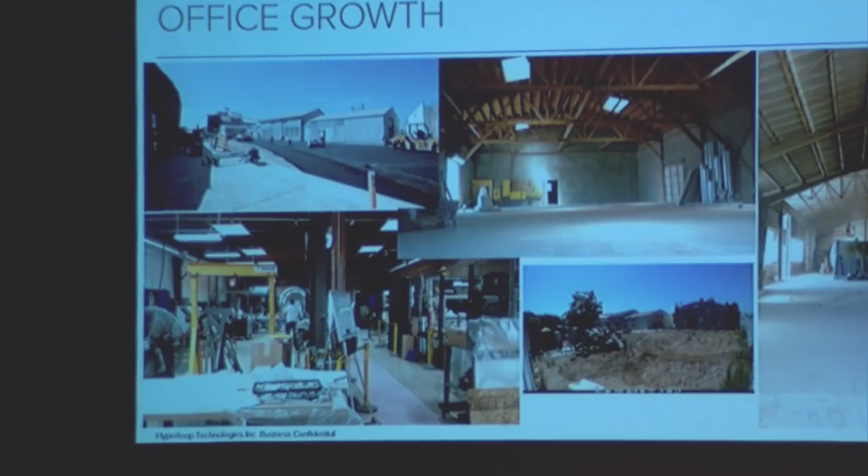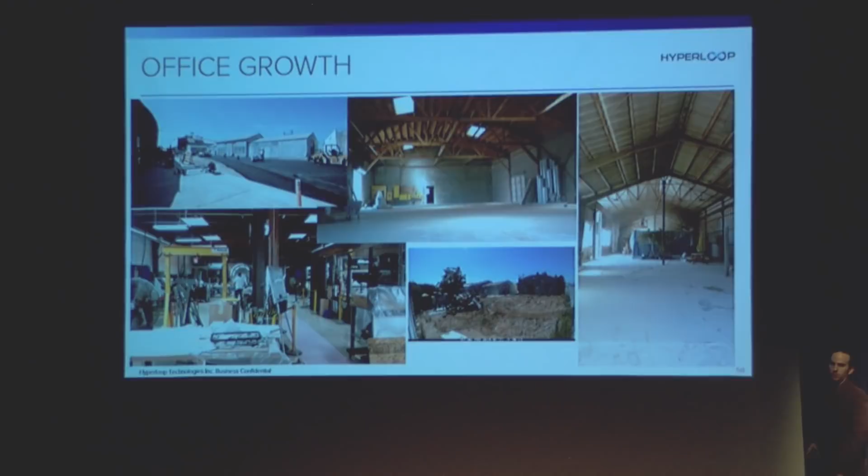We just announced our test site in North Las Vegas, about 25 minutes north of downtown Las Vegas, where we'll build the tube. We announced that deal Tuesday, and I've got 8 people at the site right now getting it ready for development. We'll be splitting soon, and there'll be a big group growing in the Las Vegas area. So if Los Angeles isn't your thing, maybe Vegas is. Maybe not North Vegas, but Vegas.

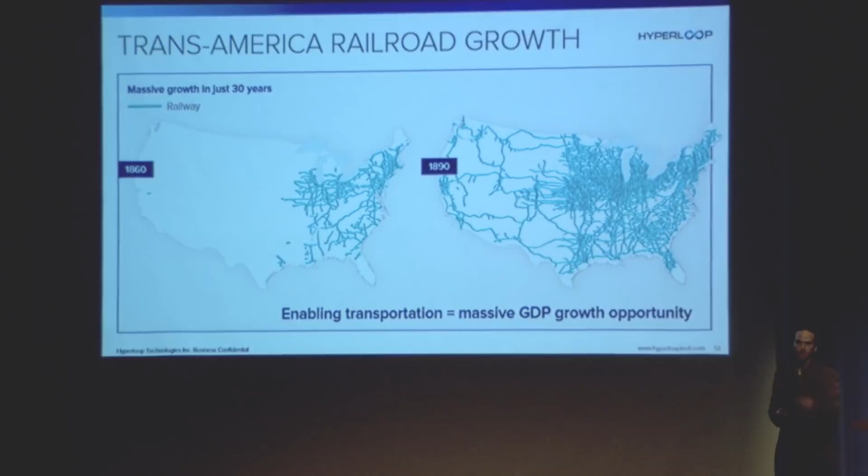Before we close it up, I want to leave you with a couple of things. When I first heard this idea, I thought it was crazy. I'm sure a lot of you out there have read all this ridiculous stuff online, and that's the first thing they tell you when you're onto something: that you're crazy. Then they tell you you're stupid. Then they tell you it can't happen. And then they're the ones saying, I can't believe it happened.

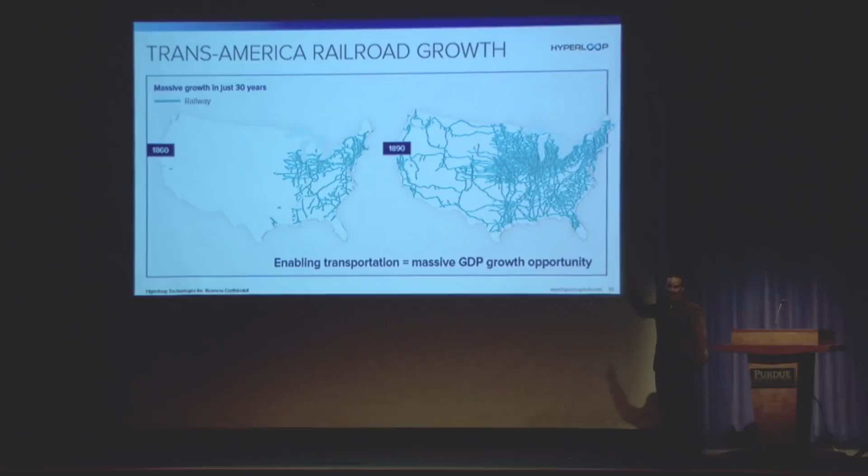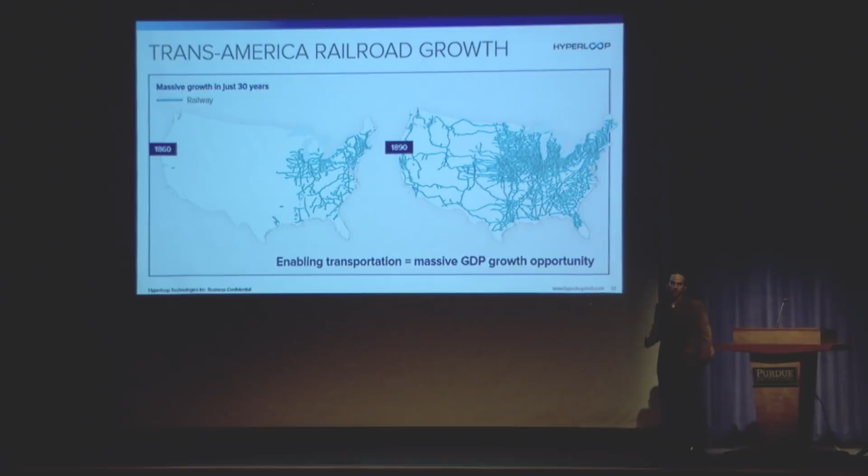This is what happened 150 years ago. There were no apps, no CFD, no computers. They took that network of rail with the sweat of men's backs and very limited machines and built it in 30 years. There's no reason to think we can't do that with the technology we have now and the experience and skill set of every engineer we've got here. So to me, if they could do that 150 years ago, what are we doing?

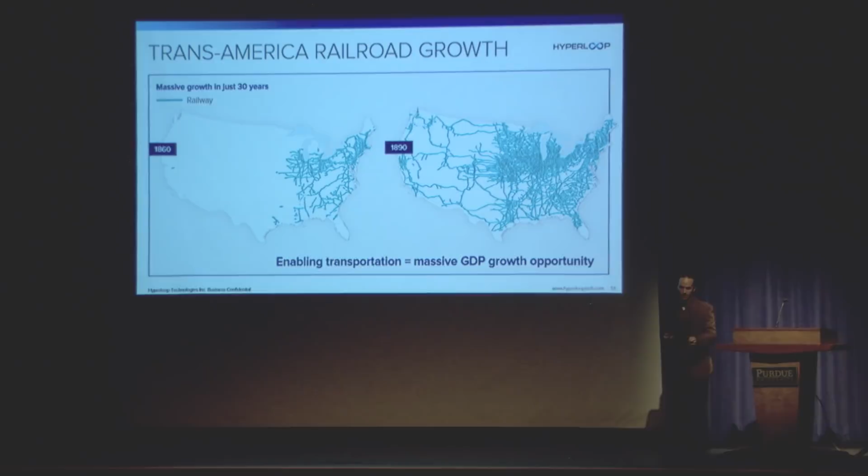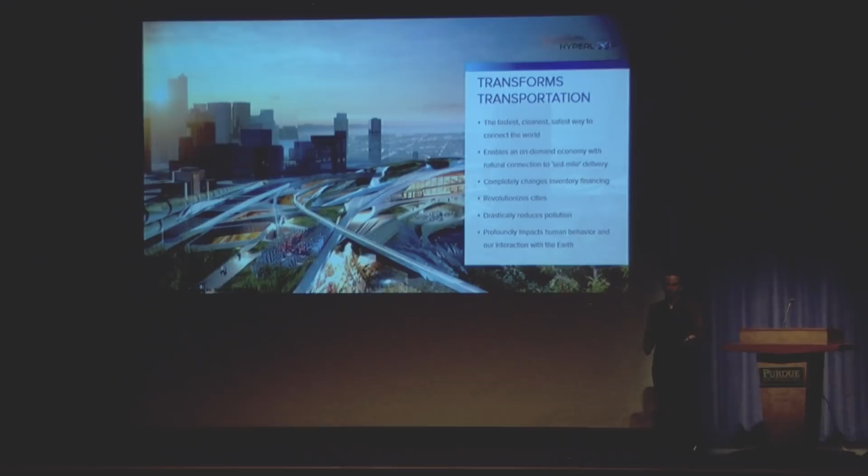I know this can be done. I know it can be done here. I know it can be done around the world. And that's really it. We're at the dawn here, like 1902, 1903. Before then, the only things that could fly were balloons and birds. After that, people could fly, and that was a massive transformational part of the 20th century. This is the 21st century, and Hyperloop's part of it, and it's going to be part of the 22nd and the 23rd.